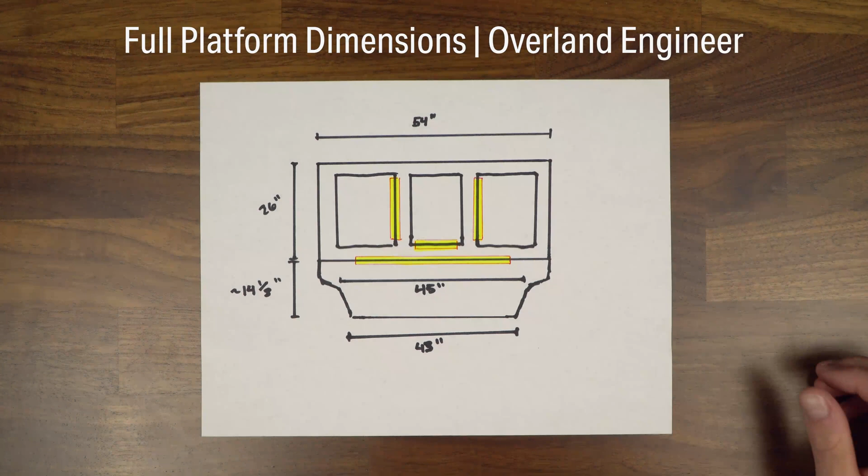I hope you got the chance to check out my full platform walk around video, where I discussed the type of platform I use in my 4Runner, how it suits my needs, and that it's an affordable build, including the dog platform it has. At the end of that video, I mentioned I'd talk through all the dimensions of the platform, but that video got way too long, so I had to put this in its own video. I'm going to walk through the middle portion of the platform as well as the dog platform, and then connect back to the previous video on the dimensions for the trunk portion.

Let's start with the plywood layout of the middle section of my platform. We have three doors that you can open, and this highlighted space with the red outline signifies a piano hinge, which is where the doors swing open. So we have these three small compartments and then one large compartment, which is pretty tough to access while on a trip, but it's still nice storage space.

Looking at this, the main platform space here is about 54 inches by 26 inches. This part down here is custom fit to go around the front of the wheel wells, which would sit right here. You'll have to do a little measuring yourself, but hopefully these dimensions can get you started. The top of this space is 54 inches wide, shrinking down to around 45 inches, then down to 43 inches. This dimension here, maybe in the middle, is more around 14 and 1/3 of an inch, give or take.

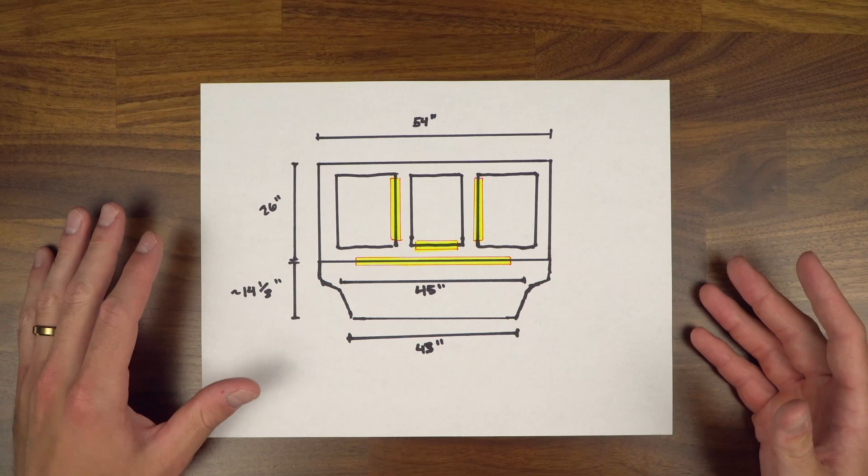This middle section was really hard to measure because I used a lot of custom measurements so it would be level on my platform and on the rubber mats in my vehicle, since I use WeatherTech rubber mats. I had to make sure it would be level with those mats, so my dimensions are a little custom, a little wonky, but everything leveled out for me. You might have to do some customizing yourself.

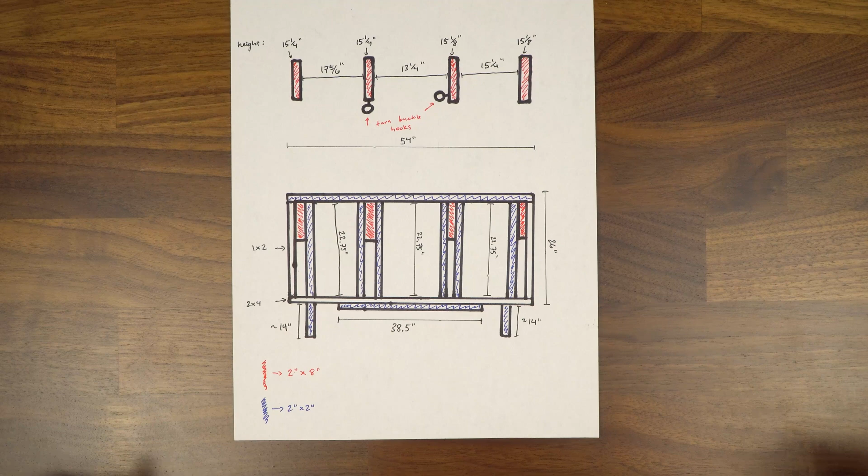Now moving on to the dimensions under that top platform surface. Under that platform is this right here. I know there's a lot going on in this picture, but I'm going to help break it down.

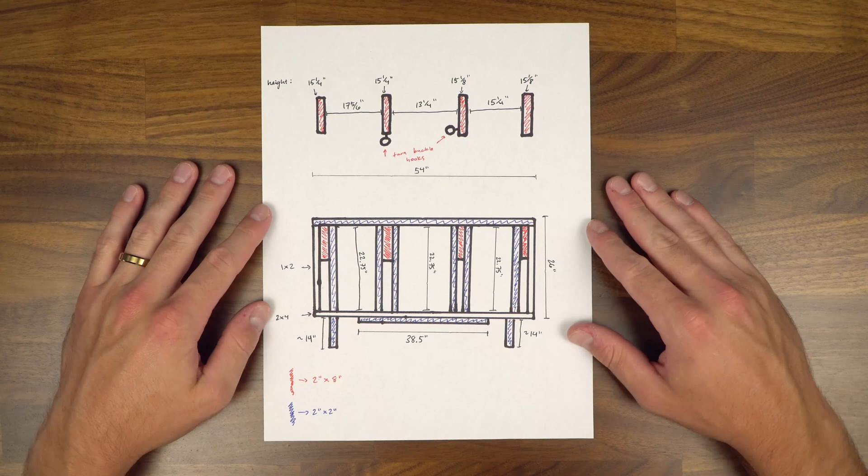To start so you have a good picture in your mind, these red shaded rectangles are the vertical 2x8s that fit around the headrests for the middle row, and that's what supports the very front of that platform so it's a level surface. When you fold down the 4Runner's back, the middle row supports aren't level, so you have to make it level somehow. That's how I did it.

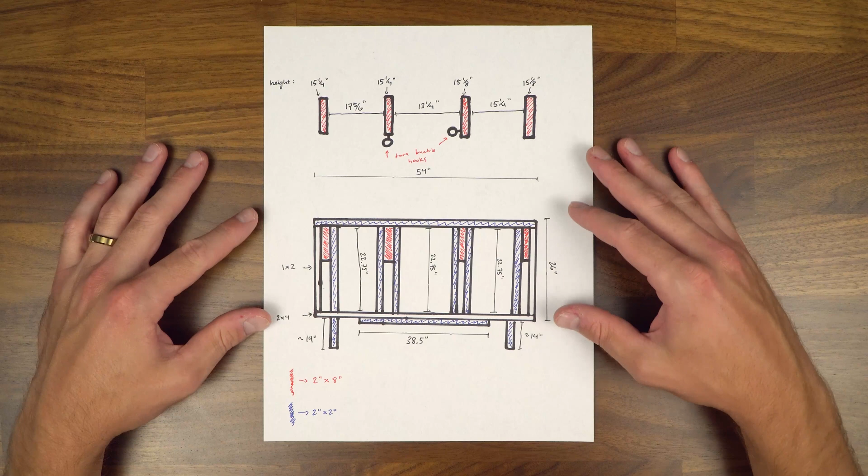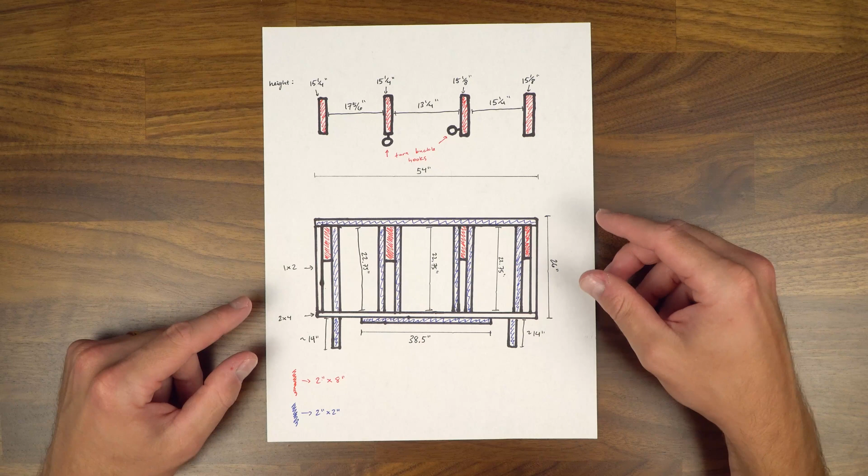The back of this big rectangle is supported by a long 2x4 that lays on the actual folded down seat back. In the front, there's a 2x2 connected to all of these 2x8s. All these supporting boards help provide more structure for the platform plywood on top, so you don't get bending and an unsound platform in the middle. As it says here, the red shading is for the 2x8 posts that support that middle section.

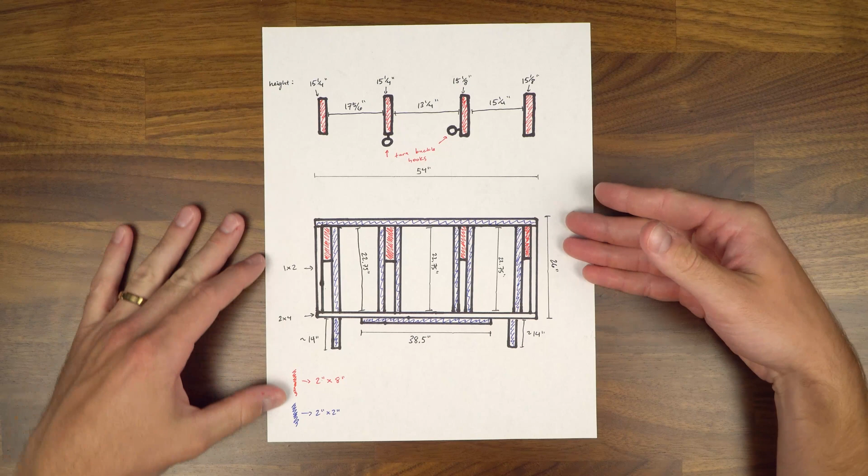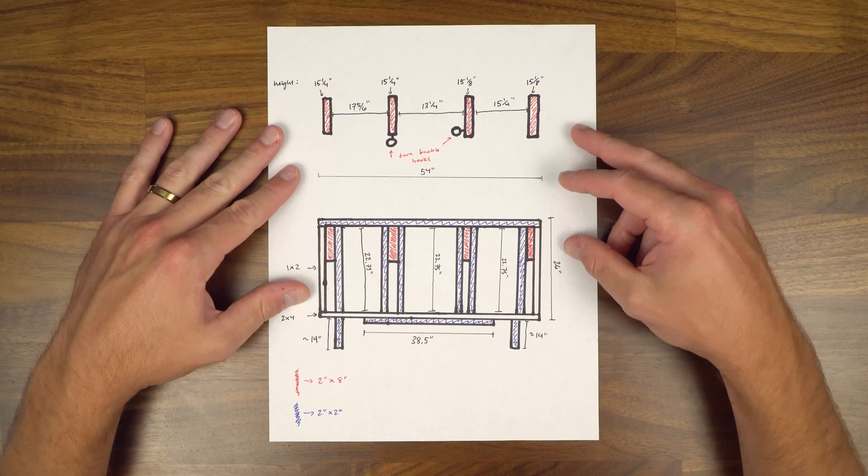The blue is for 2x2 boards, which is basically a board like that size. So I have this board right here that helps support this hinging part. And then I have these 2 small boards. These boards sit in there free floating, and that's where I mentioned in the other video, I turnbuckle crank this

thing back towards the trunk. These are boards that you just drop in there when you're putting the platform into the middle row space in the 4Runner. And then I have this long running 2x4, which is about 54 inches, the whole full length. And then there's all of these small 2x2s.

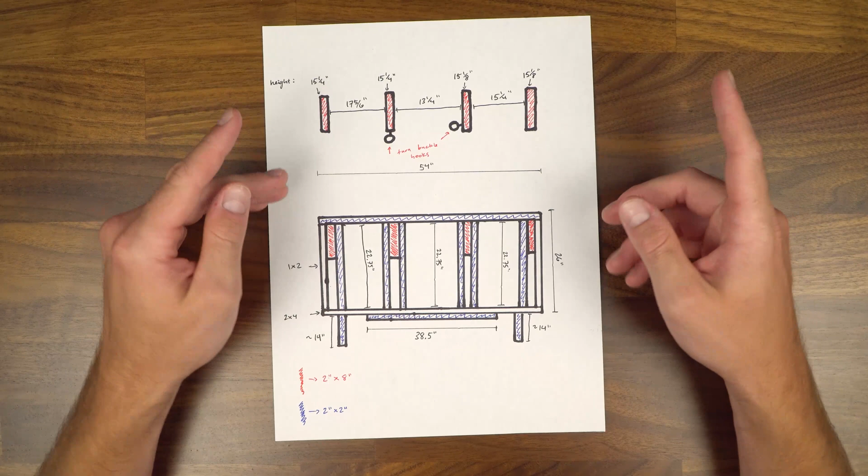And basically these pieces for each of here and here, they're supports, so when the hinging doors fold down, they have a space right here to lay on top of, and they don't just push all the way through their opening. So I hope that makes sense.

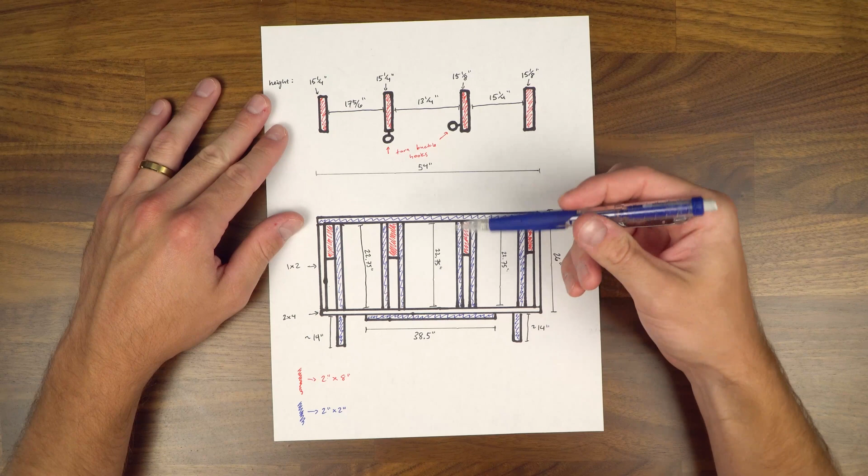And then this one, same exact thing, but this will fold up in this direction. So basically this distance inside between this 2x2 and the 2x4 at the back is roughly 22.75 inches.

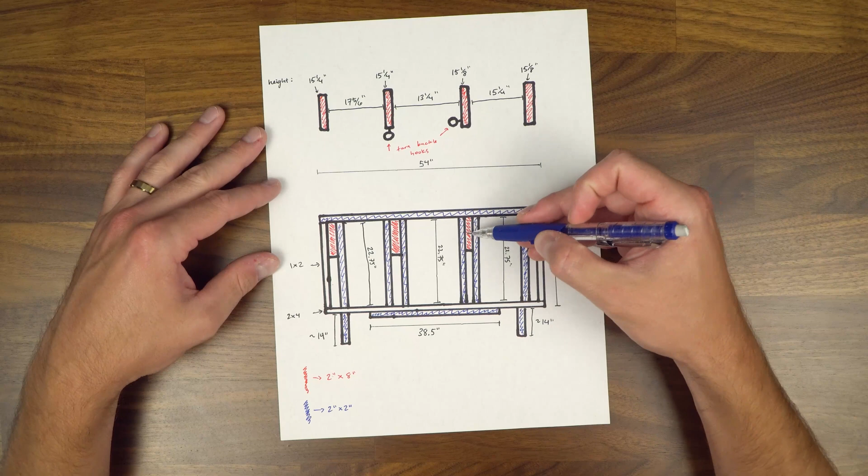Again, a lot of these things were kind of custom measured because I had to have these vertical posts fit around the headrest as well as fit into specific spaces in the rubber mats. So I had to do a pretty custom job to fit those in.

And then this is just like a vertical view of the posts that I designed. So these two on the left behind the driver's side, they're 15.25 inches tall. And then the ones on the right are 15.125 inches tall because the rubber mat's a little different on that side.

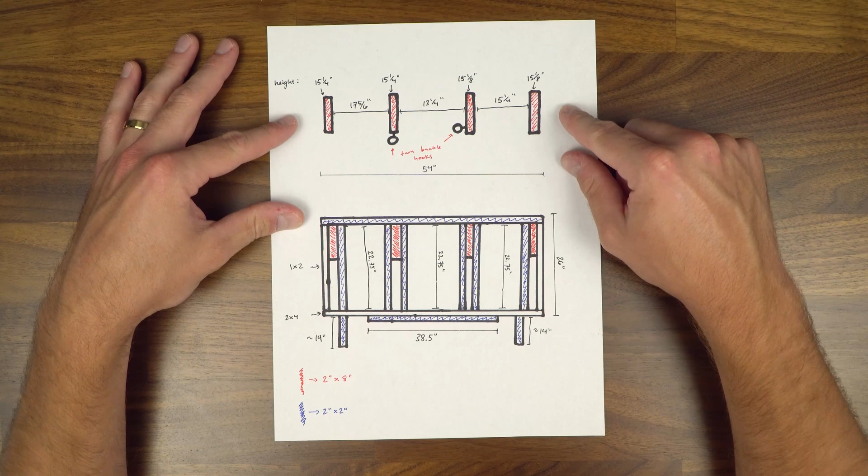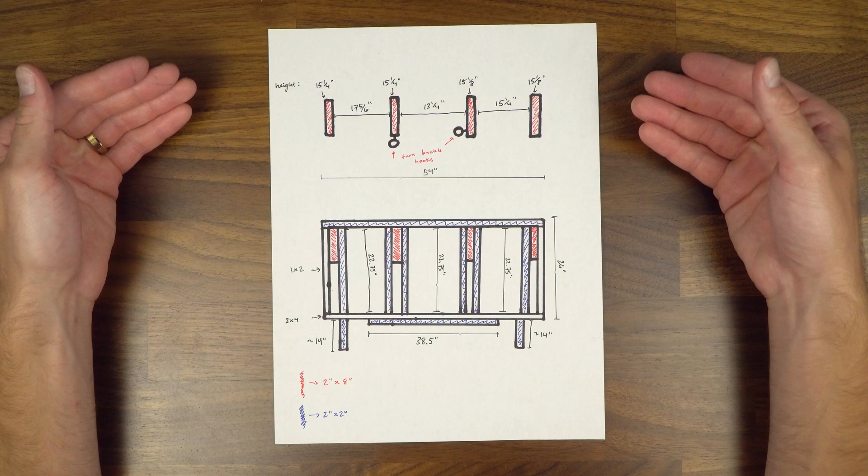I don't know if that's just how the carpet lays in the car, and you don't know that difference of somewhat less than an inch, but I found that helped level out the platform. And honestly, when you put carpet on this platform and you have carpet on the floor and maybe rubber mats, when you start cranking down on those turnbuckles, you can sort of fine tune it so that it is more level.

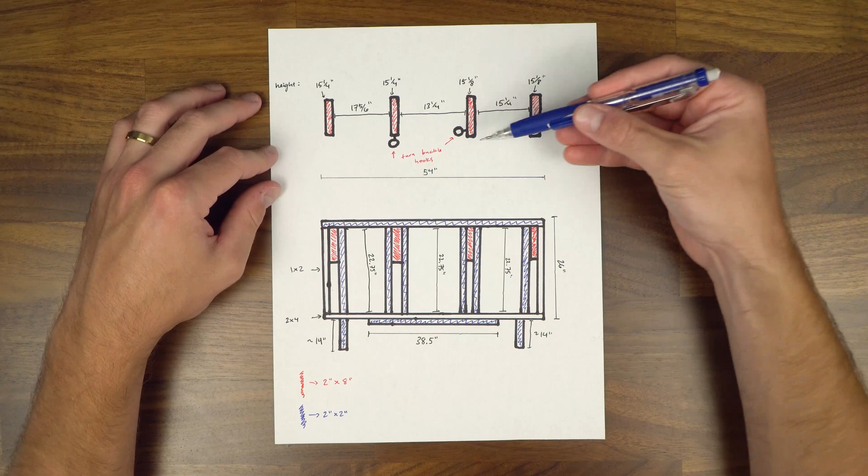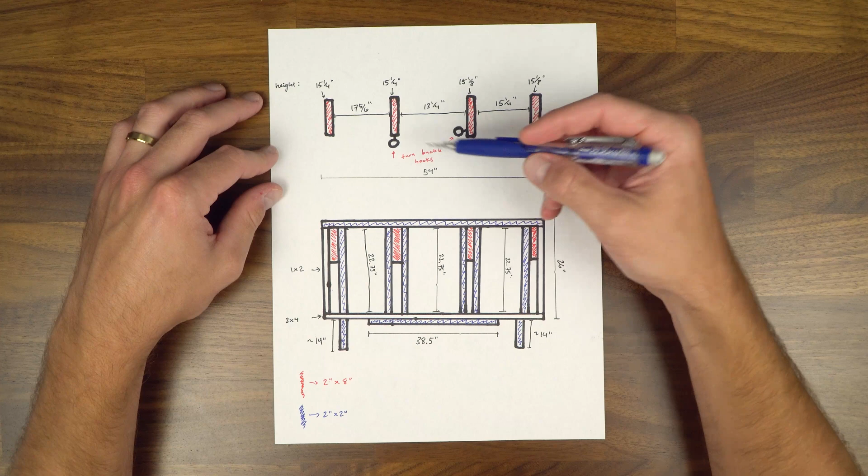And then these are the two locations where I pre-drilled a small hole and then I turned in one of these hooks, or I guess it's a loop, so then I could hook through the turnbuckle and crank down in those locations I mentioned in the other video.

So each of these posts were spaced out roughly this much, 17 and 5/16 for the left here. Then we have 13.25 and then 15.25. I don't know how I got that 5/16 number, but it's roughly around 17.25 inches or a little larger than that. But I tried to take as many dimensions as I could of the build.

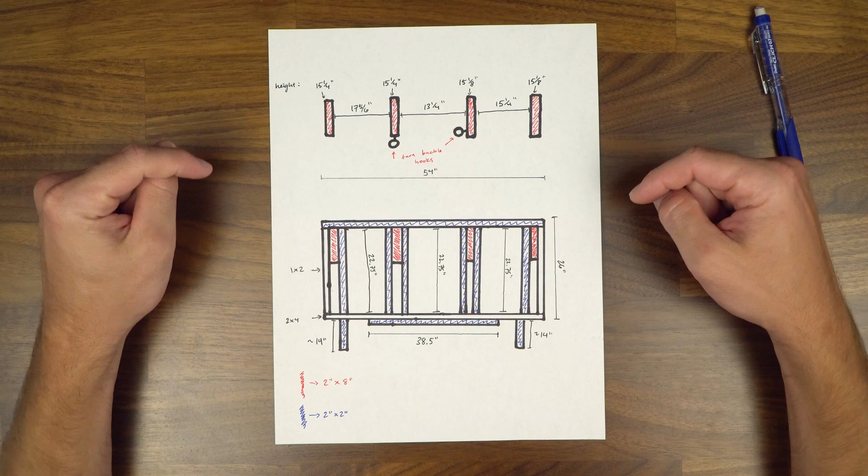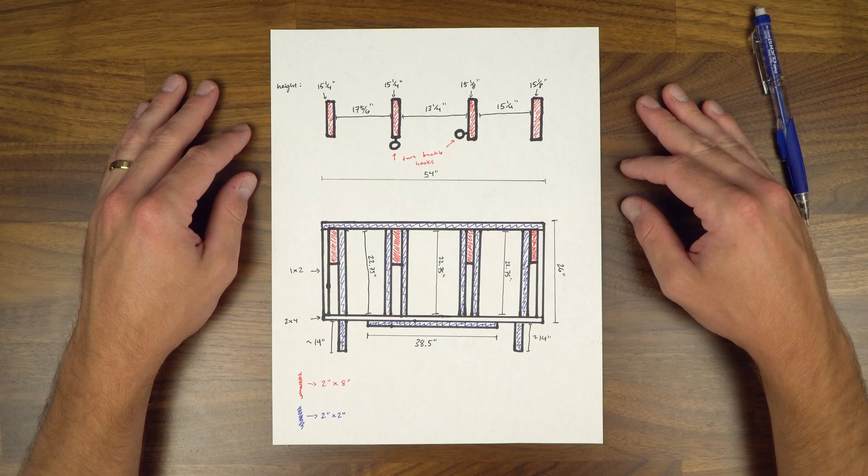And if you're trying to do something on the cheap, you're going to have to stumble through some of that measuring so that you can help yourself save money by doing it yourself. You pay a lot of money for someone who's gone through the whole process and measured out everything super specifically with perfect mounting brackets and everything. If you're trying to do it in a more affordable way or do it yourself, it's going to be very hard to replicate something like that without purchasing a lot of expensive tools.

So that's the middle section, and this is kind of a bird's eye view. So this would be the driver's side and the passenger side. Then the last thing I want to cover before I talk about the trunk layout is this, which is the dog platform. So if you remember in the video, this is where the passenger seat was and this is where the driver's seat was.

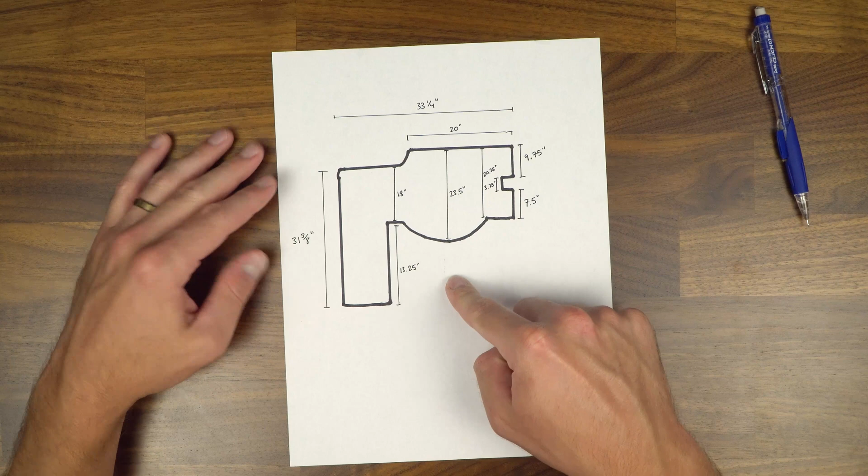This is the walkway for our dog to come off our bed and onto his bed. There's not a whole lot here I have measured. I put in some reference measurements, but you'll have to test fit this in your own vehicle because it's super hard to measure these curves. It would almost be annoying for you to mark a board based on what I've written here. Honestly, the best option would be a printout, but most people don't have printers that could print something this large for a template.

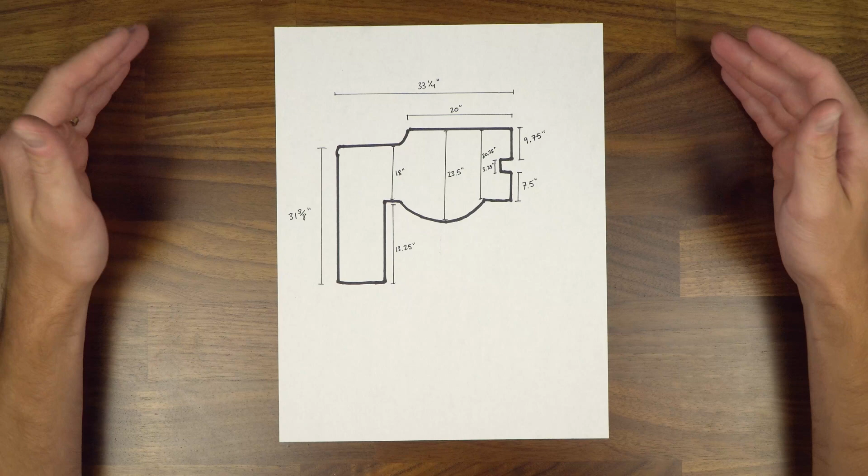So all that being said, this isn't perfectly to scale, but this distance is about 13.25 inches. We have 31 3/8 inches over here. This width is about 18 inches. So the full depth that the dog has to move around is about 24 inches, or 2 feet.

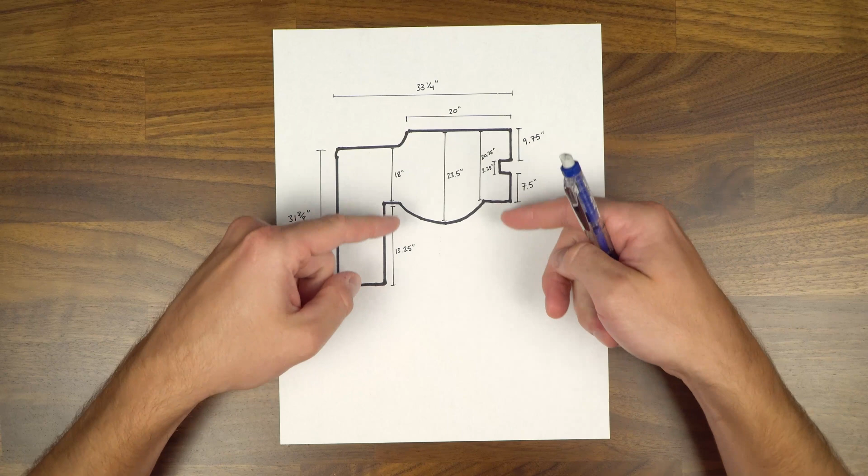23.5 inches. But you can adjust this part to move farther back if you'd like, because I moved my passenger seat forward so I had more headroom. If you're a shorter person, or you don't need the space on the passenger side, you could easily move this back.

And the reason I wanted to design this platform this way is, in a pinch, I wanted to still be able to drive the vehicle, so I didn't want a platform that stretched the whole front 2 seats. Plus the steering wheel gets in the way on the driver's side, so this seemed like a good way to do it. Now on the right here, you have this 7.5 inch insert and then this 9.75 inch insert

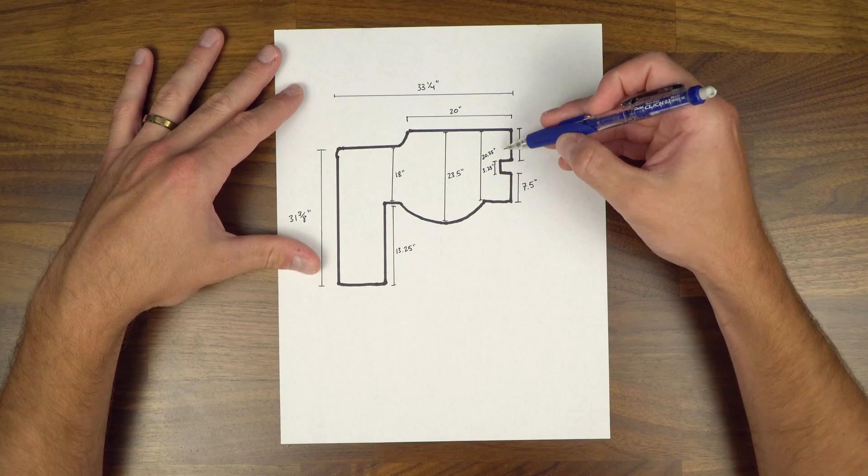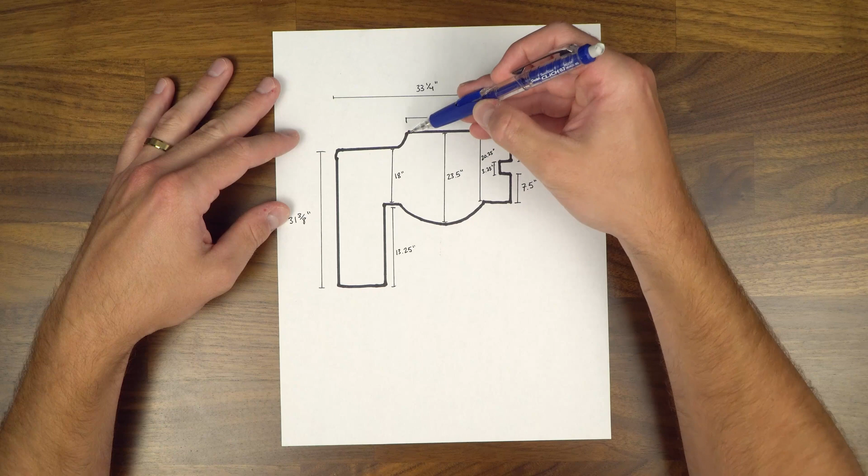that fits onto the armrest for the door. This is just another support so that this side is supported and this side is supported, so this is a bit of a bridge over the front passenger seat so your dog has that space to lay, before it has to curve around the head unit and the air conditioning and heating controls. There's about 20 inches worth that sits right in front of where the passenger airbag and glove box is.

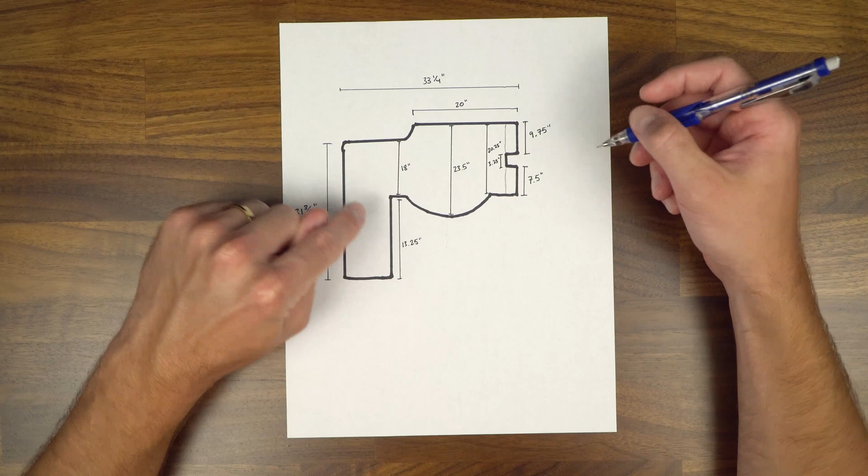And that whole platform is about 33.25 inches wide. So it's not a super large piece of plywood, and this is all just cut out of plywood. I may have cut some small sections to boost this up a little bit, because I believe the armrest is slightly lower than this part here. So you may want to cut 2 pieces of small plywood that you can attach right under the platform, under these 2 flaps, so that you can shim it up enough that the platform's level. Otherwise you might get a slope and it might be a little awkward.

And then after I had cut that out, I covered it in carpet and it blended right in with the rest of the platform, and I think it really finished it off nicely.

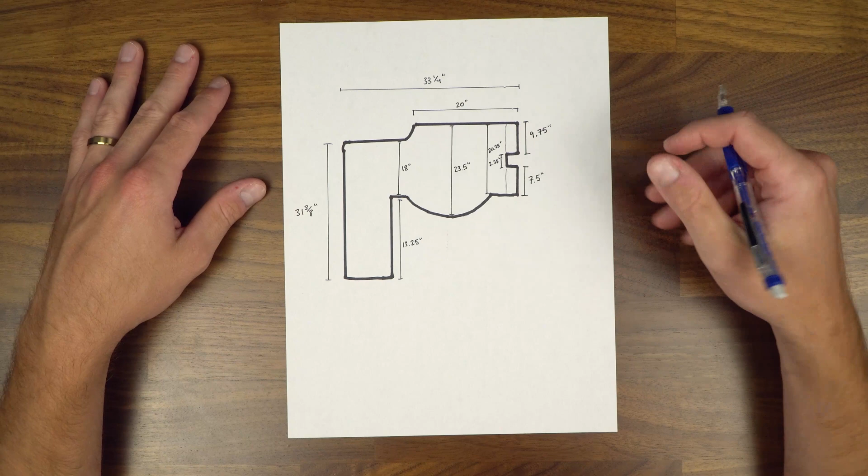If you're bored by this so far, I apologize, but I hope that these dimensions can really help some of you build your own platform. So now I'm going to continue on to the trunk portion of the platform so that you can look at those dimensions and keep on designing the platform, because really this whole system kind of works as a complete unit.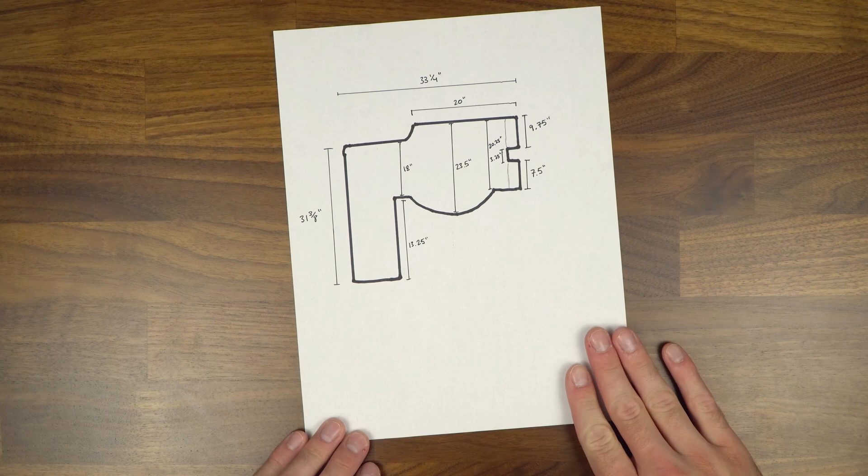If you want to build just the dog platform, or if you want to build just the trunk platform, that will work pretty well. But the center portion that I talked about at the beginning of the video is going to be kind of hard to use on its own without having that trunk portion that I've already shown in a different video. So hopefully this gives you some good inspiration, and let's move on to the trunk portion of the platform.

All right, so we're sitting down at my desk, and let's go over these dimensions. I've got them right here, and let's talk through them. First, we're going to start with the main hatch.

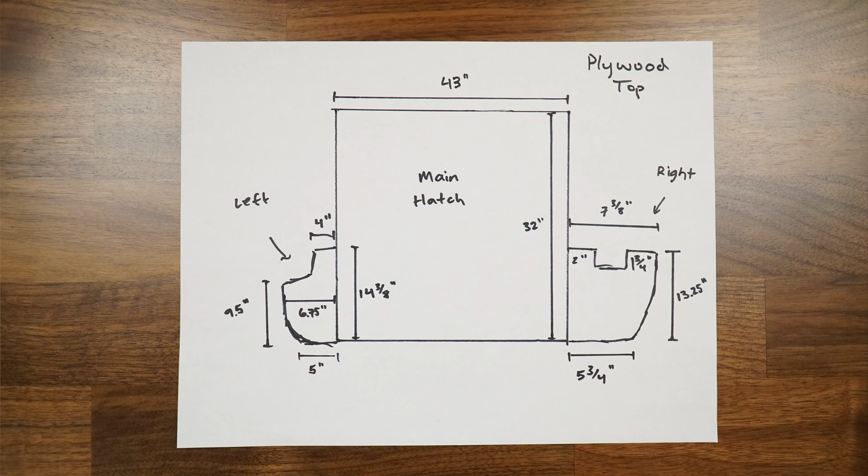So that's the top, and that's all built out of plywood, as you can see in the top right on the paper. Now let's switch over to the actual box that sits under that plywood hatch.

On the left and right, you've got those tiny cutout pieces that I was talking about that are quite custom. If you notice, there's little indents in the plastic, and that's why there's this small jut out that sticks down on either side.

Both of those are roughly 6.5 inches wide, but I tried to measure them as accurately as I could. Like I showed earlier, all of it's covered in carpet, so the dimensions maybe aren't quite precise, but that's okay. If you can get them close enough, once you put carpet on it, it should fit in your 4Runner just fine.

If you look at the dimensions of the main box, it's 30 inches deep, and then it's roughly 41 3/8 inches wide.

Just to clarify, that 30 inches deep is the length of that board in the drawing. So the front and the back of the box have the longer sections, and then the left and right sides of the box, those boards fit inside those other front and back boards, if that makes sense. So the cap is on the front and the back, not the left and the right.

That interior board is 30 inches. If you look close enough, I don't know if the colors show up well enough, but there's a navy blue shading on the top of the boards that are 2x8, and then there's a red shading on the top of the boards that are 2x2.

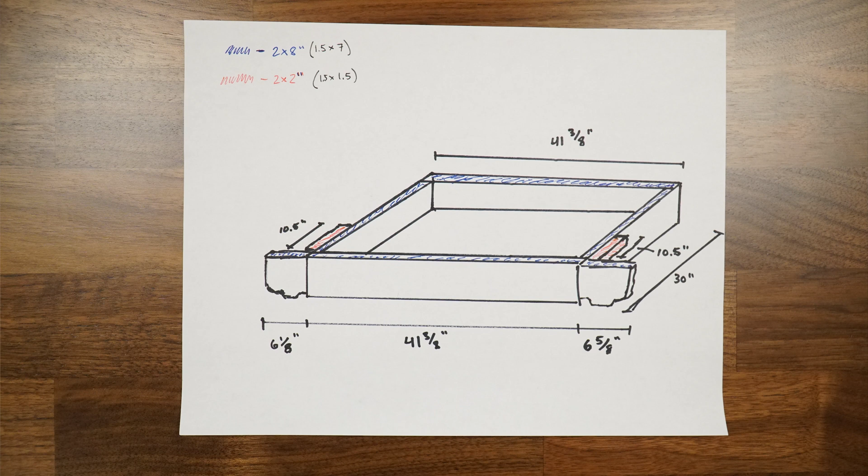Just know that those boards listed as a 2x2 or a 2x8 are typically about a 1/2 inch to 1 inch smaller than what they mention. In my experience, a 2x2 has really been around 1.5 inches by 1.5 inches, and the 2x8s are around 1.5 inches by 7 inches. So even though you're buying a 2x8, your box is probably not going to be 8 inches tall. Just giving you that forewarning up front.

So I hope those dimensions were really helpful. I really wanted to do a quick breakdown of that platform and help some of you with inspiration for building your own platform, or if you were hoping for a step-by-step guide that could give you a good place to get the bulk of the design, then maybe my hatch is a good one that you can mimic and use in your vehicle.